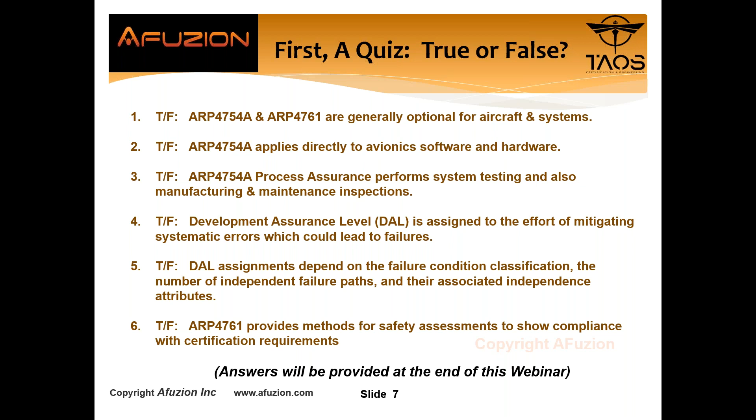6 easy true-false questions. We'll provide the answers in 45 minutes, but if you pay attention, you'll get the answers during this 1-hour training video. Okay? First of all, I'd like to turn it over to Nazan, who will tell us why these standards are mandatory. Nazan? Yes, thank you, Vance.

We call it mandatory because both ARPs support the aircraft certification process by showing compliance with 1309 requirements. The guidelines in ARP4754A were developed in the context of large airplanes, Part 25 aircraft, but it can be applicable for other parts like 23, 27, 29, and 33 and 35. That means small aircraft, rotorcraft, engine, and propeller.

ARP4754A provides development assurance for functions and systems only, and sets objectives based on those development assurance levels.

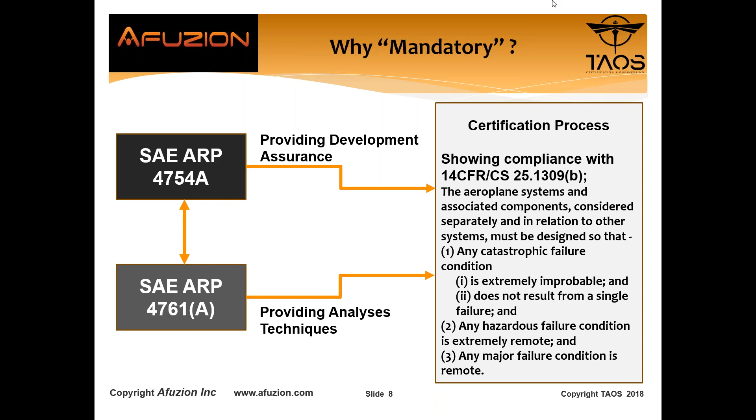The FAA also issued AC 20-174. It recognizes ARP4754A as an acceptable method for establishing a development assurance process. Also, FAA AC 25-1309 Arsenal version and EASA AMC 25.1309 recognize both ARPs as an acceptable method for showing compliance.

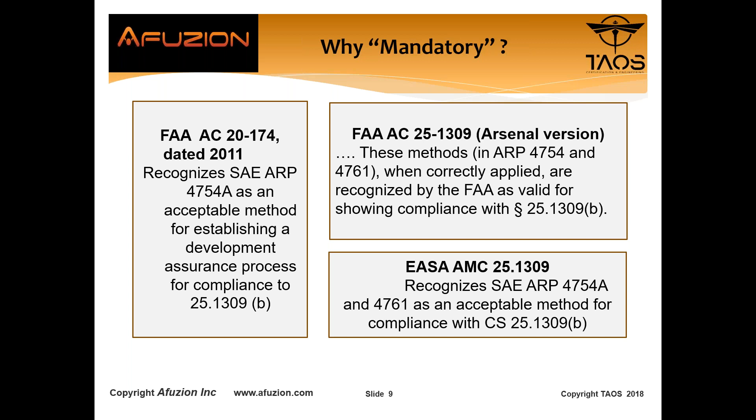And I am giving the words to Vance for the 4754A presentation. Thank you, Nazan. Let's talk about 4754A just a minute.

Nazan summarized 61. Now, 4754, the prior version, was certification considerations for highly integrated or complex aircraft systems. What a word, right? Highly integrated, complex, very subjective. That was the issue. While generally mandatory, it really wasn't enforced.

It came out in 1996, right about the time aircraft complexity was really dramatically increasing via hardware, software, and architecture. We needed a new document, 4754A, one little letter, the A version, the next version. It was almost 14 years later it came out, in 2010, but it was mandatory in 2011.

Look at the name, Guidelines for Development of Civil Aircraft and Systems. However, it's now being applied to military and other industries.

4754A was guidelines, and so we need to consider the overall aircraft operating environment and functions by continuously considering the system safety assessment. So it includes the validation of requirements, verification of the design implementation, and also process assurance, which remember is quality assurance on steroids, right? We call it process assurance because it's more than just developmental QA.

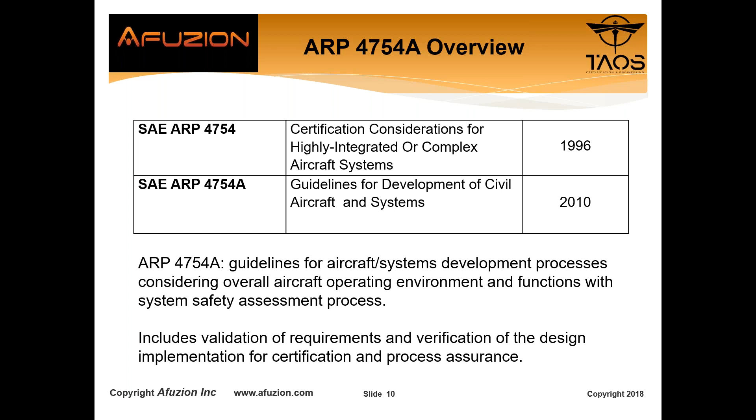It's all aspects of the integration, suppliers, audits, and everything.

And then the appendices. We have real objectives, okay? We have a safety program plan. We have FDAL and IDAL, big words. Nazan will explain those. And then we have the appendices. So we'll go ahead and talk about that and how we move those.

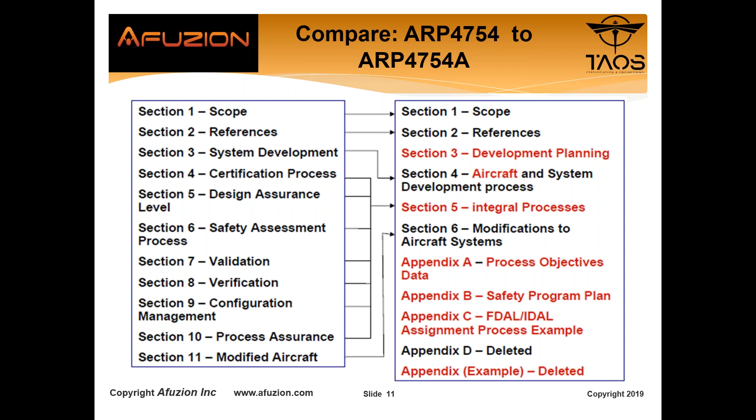And it's going to be really important to see how the new version, just coming out here, it's all done, should be released this year, 4761A, how that has changed also. But look at the model of 4754A.

Then we allocate the functions of the aircraft to various systems: thrust, control, landing. Then we develop the corresponding system architectures and aircraft architectures. We allocate system requirements to specific items, implement those items, and then we have the document suite. Look at that, it's rather a progressive waterfall.

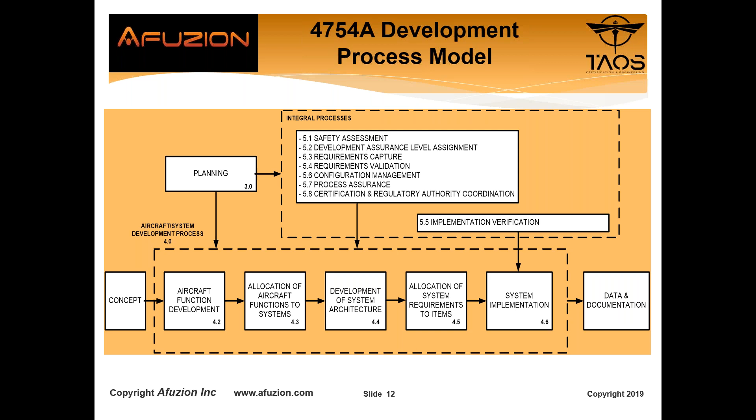And then requirements, validate those requirements. Configuration management, process assurance, and certification. Those are continuous in the background. That's the ecosystem, and it affects the hardware and software, as we'll see in a moment as well.

Well, right here, for safety critical development, we've got three key processes. This is identical throughout the software 178C, hardware 254, CNS ATM ground-based systems DO278.

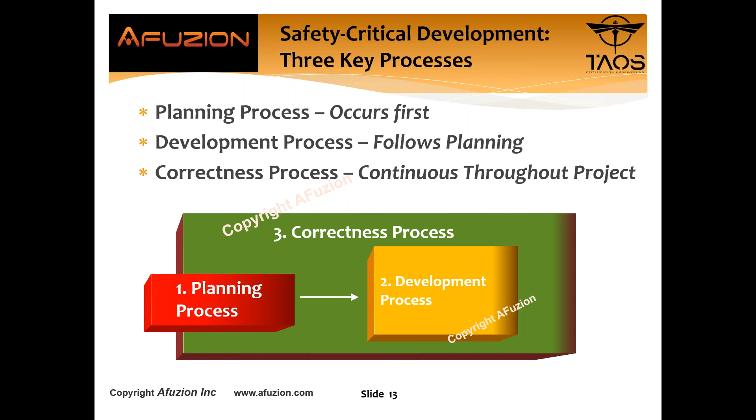Why is that green? Great question. I made it that way because green is the color of American money. All of our money in America is green. Green means money. The most expensive part of systems development really is the correctness process. The least expensive is the planning. It's the smallest, but it's the most important. If we don't have good plans, we cannot assess to those plans.

Okay? So let's look. There are 6 basic steps of 4754A. First, prove that we have applicable adherence to regulations and certification guidelines. So we have to plan our aircraft and our systems development lifecycle with detailed plans. We have to show how we're going to have interfaces within that ecosystem. Then, next, we start these safety activities. We implement them. We follow 4761, and we'll be explaining those in just a moment.

We have to define, then justify the criticality level, the design assurance level, the DAL, the development assurance level. Wow, 6 words, they all mean the same thing. DAL, how critical is it? Then define the system architecture and the requirements. Validate those. Remember, verification: do I have an implementation that meets the requirements? Validation: do I have the right, correct, complete requirements? They're equally important, but in our opinion, validation is more important. It's fundamental in 4754. If we don't have the right requirements, it doesn't matter if we implemented them, right?

Number 5, then perform verification. Does implementation meet those requirements? And ensure we have configuration management so we know who made every aspect of the system and safety processes for everything that's flying. Can we rebuild it 30 years later? And finally, implement process assurance. That's quality assurance on steroids, remember? And prove the transition criteria, entry, exit. Before we progress to the next stage within this process, have I met all the entry and exit criteria? That's transition criteria. Engineers follow the transition, QA assesses and records it.

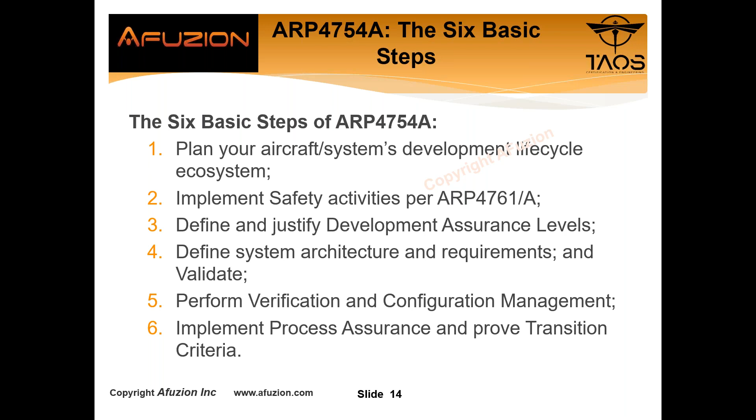So the planning element, let's talk about 2 slides here. There's 8 steps total. Number 1, development planning. What are the process methods for establishing our architecture, either aircraft or system, subsystem, or item? How are we going to develop it, integrate it? How are we going to implement it? How will we show compliance with 4754, 4761, all of the TSOs, technical standard orders, STCs, supplemental type certificates, all those aspects that apply, plus the EASA, FAA, CAAC, Transport Canada, whatever our certification authority is. And remember, folks, military is adopting this as well.

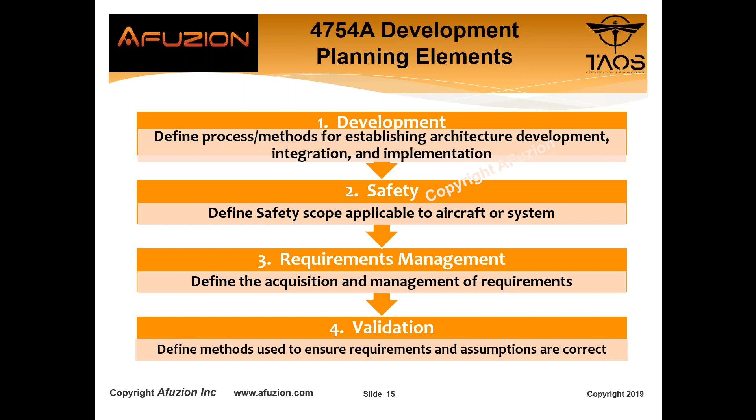So we have to define the safety scope that's applicable to the aircraft or system, and we'll use 4761 for that. We'll see in a moment. We have to show that we can manage the requirements, define how we acquire them, how we manage, how we determine the safety requirements, then validate. What are the methods I'm going to use to ensure the requirements and the assumptions are correct, complete, feasible, unambiguous? Then implement. That's often through 178254.

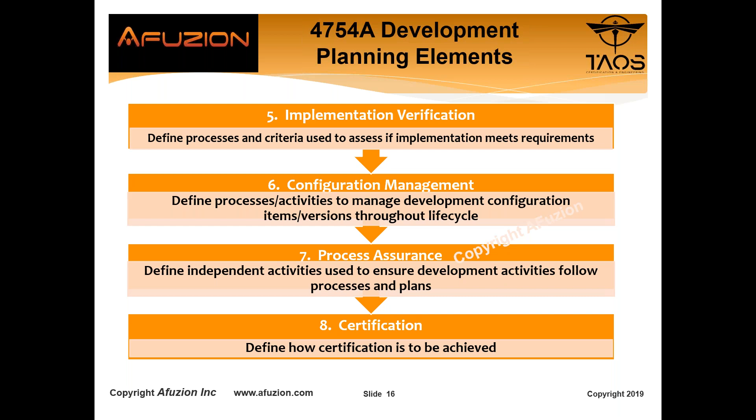The good news, folks, once each of you has these good plans in place, you should have portability for future projects. You should be able to use them with very few changes on the subsequent projects. So do it right the first time. You won't have to do it again. The ecosystem looked like this.

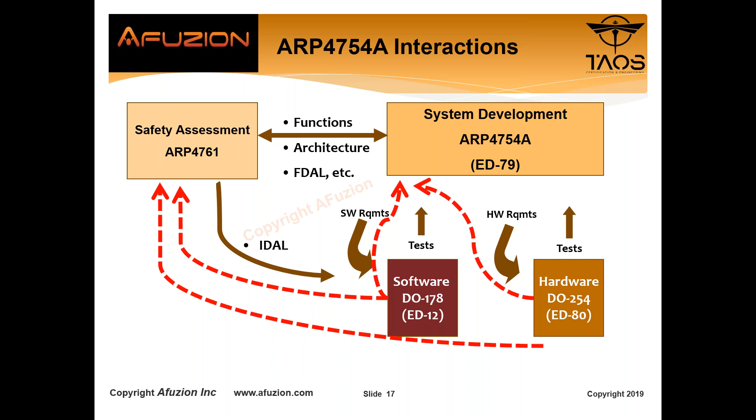ARP4761 describes the guidelines and methods for performing safety assessment and analysis. As we see, we use those guidelines as showing compliance with certification requirements. 61 is applicable for all aircraft types, small, large aircraft, rotorcraft, UAVs, military aircraft, and also it can be applied for engine and propeller. So the current version was initially published in 96, but the A version will be published this year, Q3.

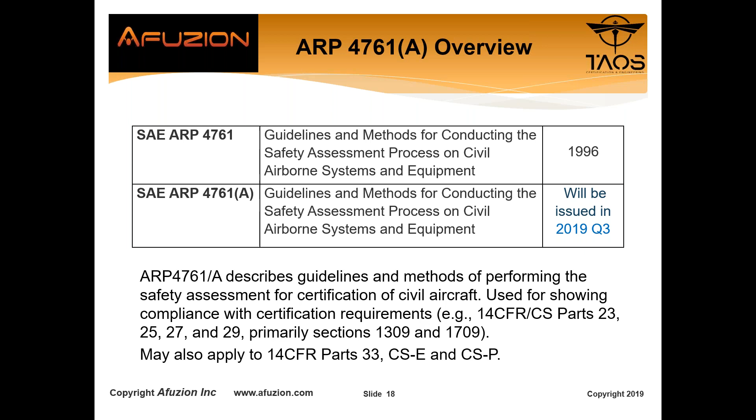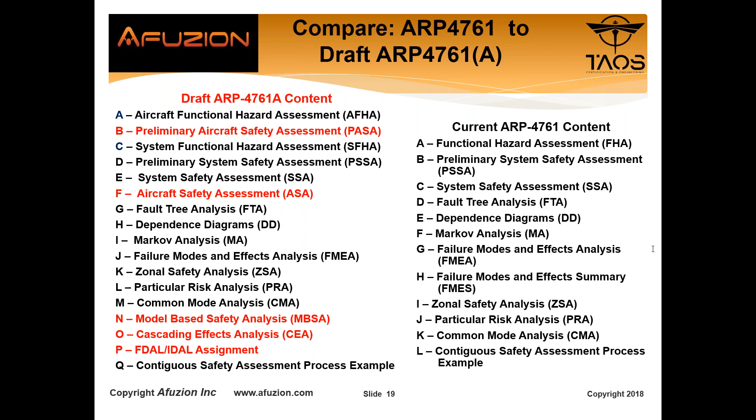ARP4761 applies to everyone, from aircraft manufacturers like Boeing, Airbus, Bombardier, TAI, or STC holders, system integrators like Honeywell, Rockwell Collins, equipment suppliers, a wide range of avionics equipment providers, certification authorities, FAA, EASA, Transport Canada, and other CAAs.

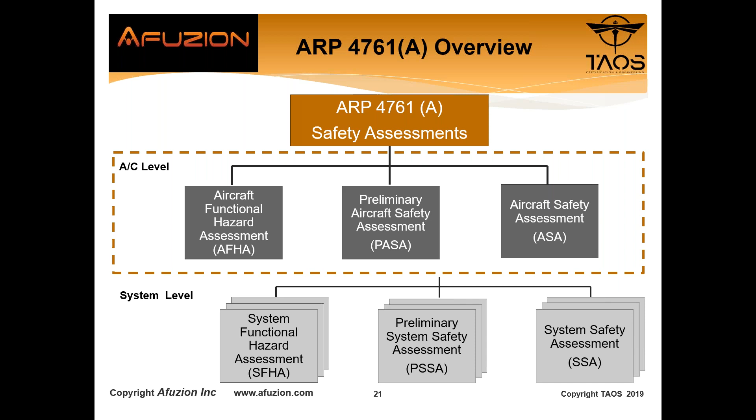There are a number of analyses in 4761: fault tree analysis, dependence diagram, and Markov analysis. Fault tree analysis supports PASA and PSSA. It evaluates a proposed aircraft and system architecture to assign hardware failure probability budget. It also identifies functional failure sets in order to assign development assurance levels during the PASA and PSSA process. It shows compliance with qualitative and quantitative safety objectives as part of the SSA and ASA.

Failure mode and effect analysis is a bottom-up analysis technique. It identifies failure modes and failure effects. It can be developed at any level, like function, system, equipment, or piece part. FMEA may be performed for any reason, but in 4761 appendixes, it is addressed to support the safety assessment process.

Cascading effect analysis is a new analysis in 4761A. It is a qualitative bottom-up analysis technique. It evaluates an initiating condition and its total effect on the aircraft. Because of the system dependencies, an initiating condition may propagate from impacted systems to other connected systems, like resource system failure modes, like shared component failure modes.

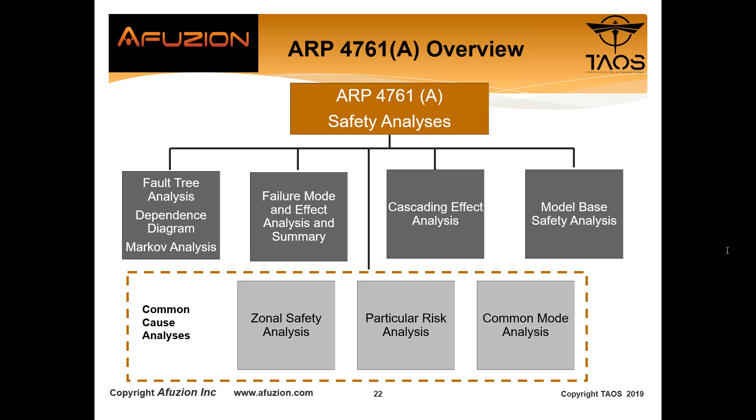Now, development assurance. What is development assurance? Development assurance is a process, planned and systematic actions that provide an adequate level of confidence that errors, I'm just emphasizing errors, in requirements, design and implementation have been identified and corrected. Understanding of error contribution to a failure is important. Failures can be divided into two categories, systematic failures and non-systematic failures. Mitigation of non-systematic failures, like random hardware failures, is performed by setting safety qualitative and quantitative requirements.

But systematic errors that lead to failure are not associated with any physical changes and will always occur when a given set of conditions are satisfied. Software failures are always systematic. Specification errors, requirement errors, design errors, component deficiencies, all those are systematic errors.

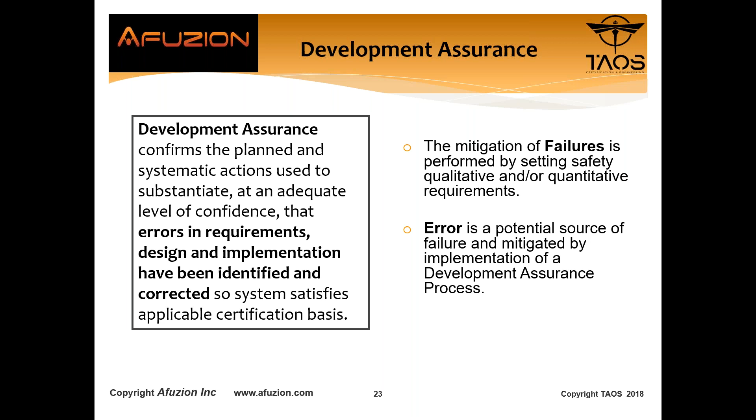So for simple systems, errors can be detected by exhaustive testing, but for complex and integrated systems, exhaustive testing may be impossible or impractical because of the number of tests, and all of the system states cannot be determined for those tests. For this type of complex system, compliance is shown by using the development assurance process identified in 4754A. Next slide, please.

There are two types of development assurance level in ARP4754A, FDAL and IDAL. DAL sets the level of rigor for development assurance activities, FDAL for function and system, IDAL for hardware and software. Traditionally, development assurance was performed at component, hardware, and software level by DO-178 and DO-254. But for today's complex systems, it was insufficient. Therefore, an additional development assurance process for aircraft and systems is defined in ARP4754A as FDAL. So 4754A defines the process to apply it only for FDAL, and 4761 safety processes identify FDAL and IDAL. Next slide, please.

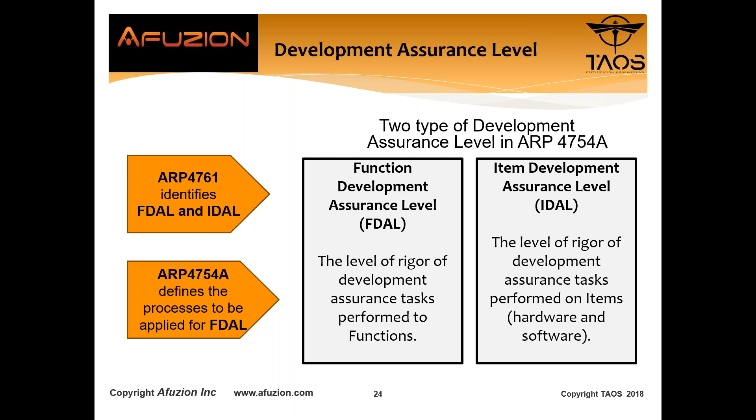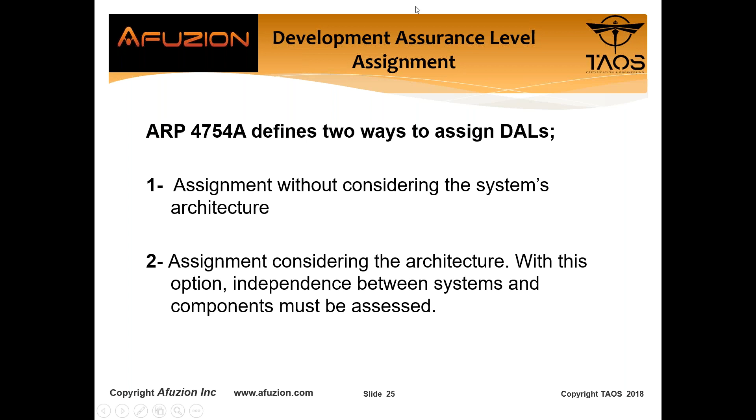ARP4754A defines two ways to assign DAL. One way is assignment without considering the system architecture, and another way is assignment considering the system architecture. With this option, independence between system and components must be assessed. Next slide.

For a good understanding of FDAL and IDAL assignment, we need to understand the definition of functional failure set, members, and independence. A functional failure set is equivalent to a fault tree minimal cut set. A minimal cut set, as we know, is the smallest combination of basic events which, if they occur, will cause the top event to occur. So a member of an FFS can be an aircraft system function or item that may contain an error causing its loss or malfunction. Independence is a concept that minimizes the likelihood of common mode errors between aircraft system functions or items. So the FFS looks from an error point of view compared to a fault tree minimal cut set. Next slide, please.

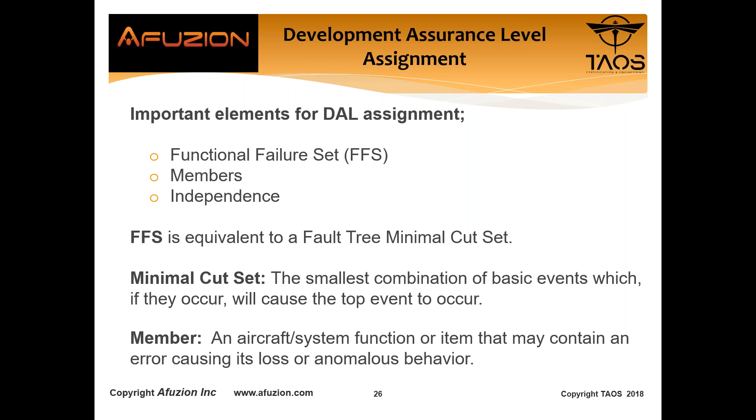In 4754A, there are two tables. The first one explains how we assign DAL without architectural consideration. According to this table, FDAL is assigned to a top-level function based on its most severe top-level failure condition classification, identified in the FHA. So classification using this table may result in a more conservative assessment. If the failure condition classification in the aircraft or system FHA is catastrophic, we assign DAL A. For hazardous, B. Major, C. Minor, DAL D. No safety effect takes DAL E. Next slide.

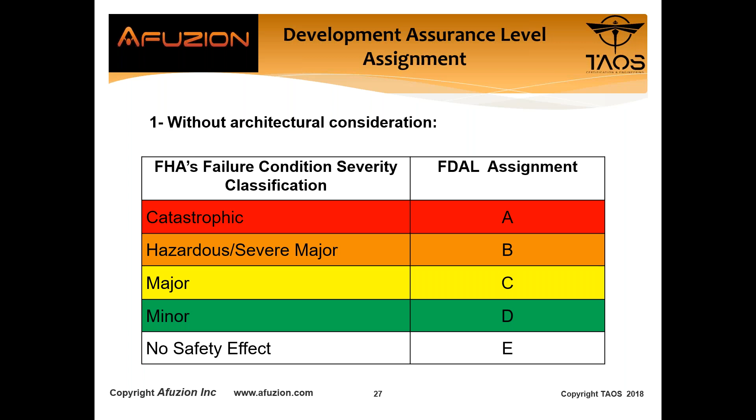Second DAL assignment table in 4754A considers the architecture. Once an aircraft FDAL is assigned to a top-level function based on the first table, the architecture of system functions is examined to determine the development assurance level of those system functions. If a catastrophic failure condition could result from a combination of possible development errors between two or more independently developed aircraft system functions or items, we can use option 1 or option 2.

So one member can get FDAL A and the other one can get FDAL C, or both members can get FDAL B. Let's just imagine we have a navigation and communication system. Both systems provide flight data. Since those two systems are independent from each other, we can use either option 1 or option 2. So we can assign the navigation system FDAL A, communication system FDAL C, or both systems can get FDAL B.

Or for example, in our design, we have a primary flight display and a standby display. Since both displays are independent from each other, we can use this table, option 1 and option 2. Primary flight display can get FDAL A, and the standby system can be assigned FDAL C, or both systems can get FDAL B. We can use option 1 and option 2 as long as we show the members are independent. Members mean systems like navigation and communication, primary display or standby display.

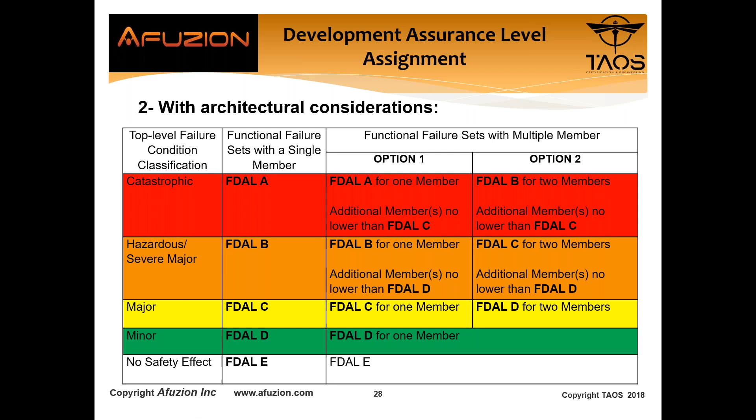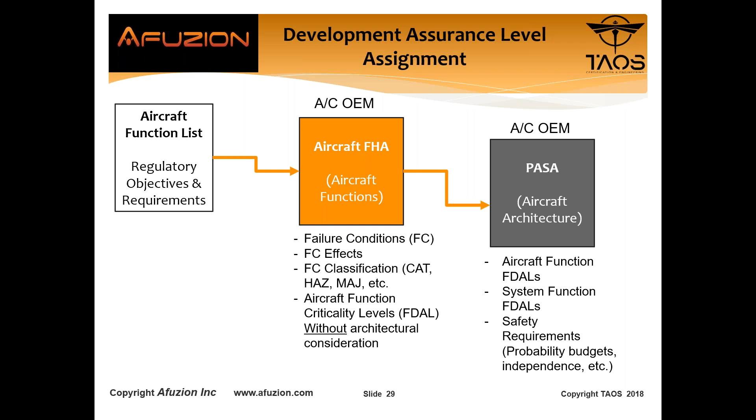And then those requirements go into PASA, preliminary aircraft system safety assessment. So we evaluate the proposed aircraft architecture. As an output of PASA, aircraft function FDALs, system function FDALs, safety requirements, probability budget, and independence requirements are generated. Next slide.

In this slide, we summarize the system level top-down assessment. The aircraft OEM performs their FHAs and PASA. All the requirements and system list go to the system provider's system FHAs. System FHAs evaluate system functions. System failure conditions, effects, and classifications are generated as an output of system FHAs. Those failure conditions and classifications go into PSSA. PSSA evaluates the proposed system architecture.

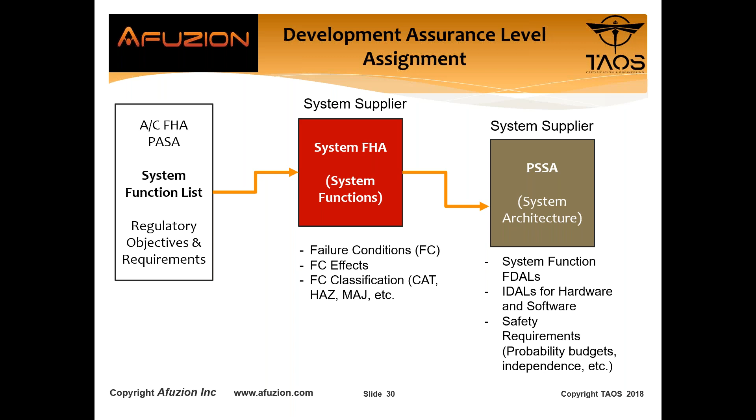As an output of PSSA, system function FDALs and IDALs; in this case, we assign DALs for hardware and software by preliminary system safety assessment. Safety requirements, probability budget for components, equipment, items, and independence requirements are generated by preliminary system safety assessment. Next slide will be an example.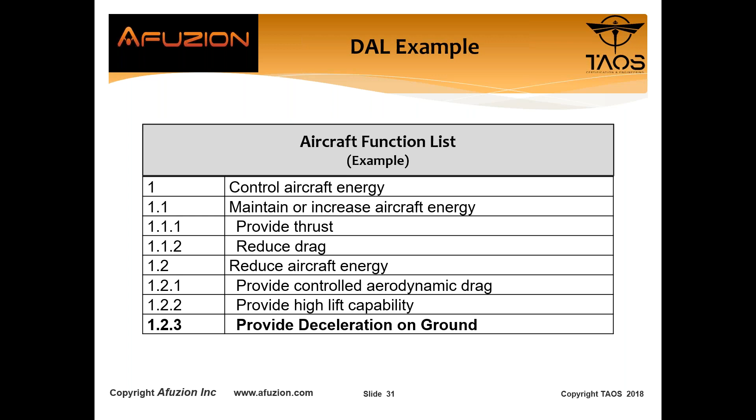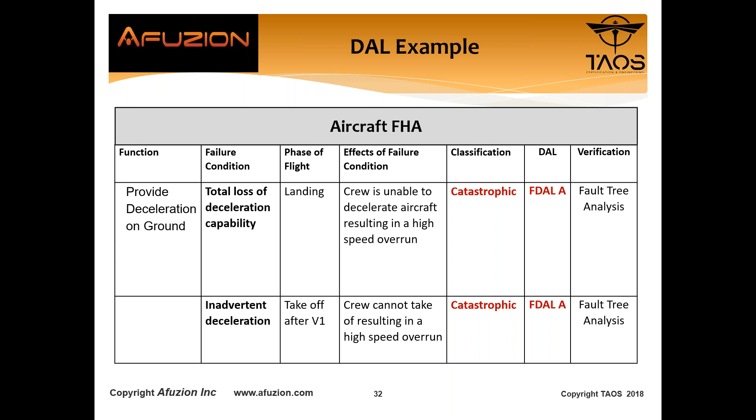Provide deceleration is one of the aircraft level functions. We assess all the failure conditions. Total loss of deceleration capability and inadvertent deceleration lead to catastrophic. So we use table 1. Since the classification is catastrophic, we assign those failure conditions FDAL A. Next slide. These functions and classifications go into PASA, Preliminary Aircraft Safety Assessment.

In this assessment, we evaluate the proposed aircraft architecture. In our example, the provide deceleration on ground function is performed by the engine thrust reverse system, ground spoiler system, and wheel brake system. In the next slide, we will evaluate those system interactions in a fault tree. Next, please.

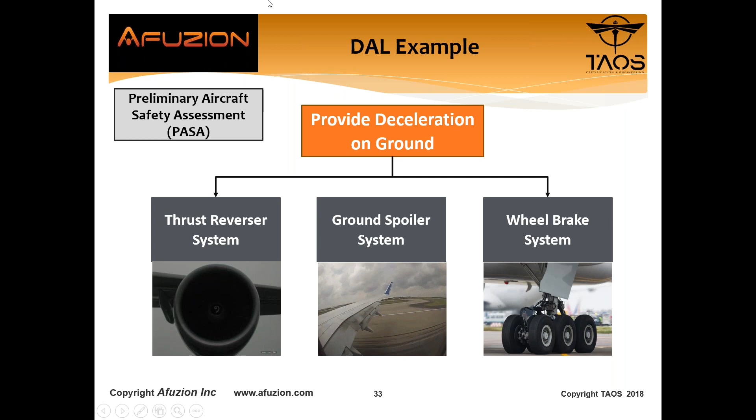In the fault tree, we generate a minimal cut set, functional failure set. As we see in the minimal cut set, there are redundant, independent systems. So failure of thrust reverse and speed brake, or failure of thrust reverse and wheel brakes, leads to total loss of deceleration capability. Since we have 2 members in the FFS, we can use table 2, option 1 and option 2. We can assign one system level A and the other level C, or both systems can get level B.

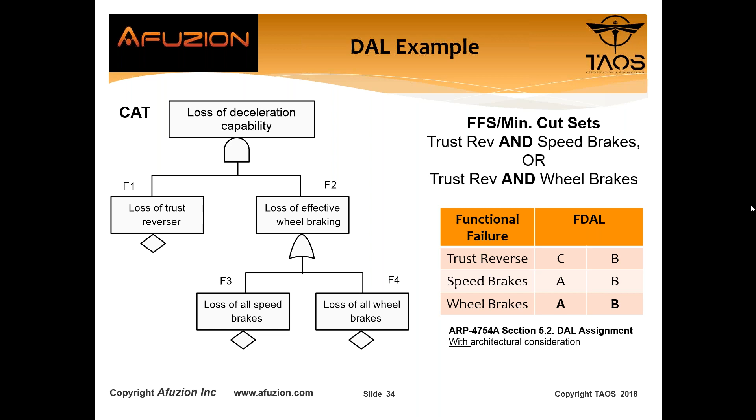But before we finally assign DAL, we have to assess all failure conditions. In the next slide, we will see how it changes the allocation of DAL. Next, please.

Here is another failure condition, remember, it was catastrophic: inadvertent deceleration after V1 decision speed. In the fault tree's minimal cut set, we see each of the systems alone leads to inadvertent deceleration. So single member FFS. In this case, we cannot get credit from architecture. We cannot use option 1 or 2. We have to assign each system level A: thrust reverse FDAL A, spoiler FDAL A, and wheel brake FDAL A. So we know the deceleration function is FDAL A and the wheel brake system is FDAL A.

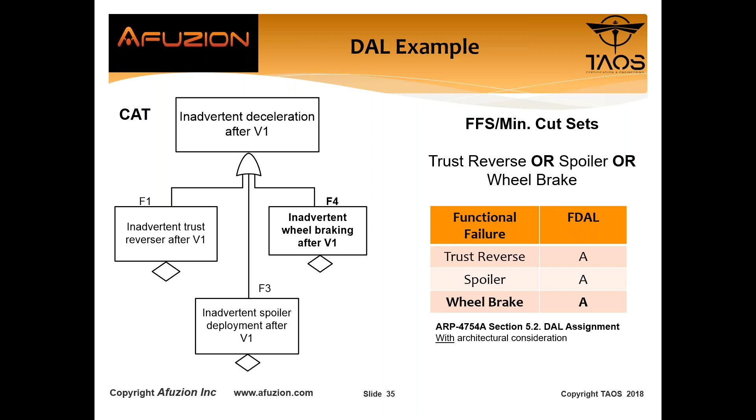In the next slide, we will go deeper into the PSSA process. So now we know the wheel brake system is FDAL A, and we assess the proposed system architecture.

System has complex BSCU control computer, braking system control unit computer, which leads to inadvertent braking, which is catastrophic. BSCU has 2 command and 2 monitor channels, independent from each other. This is the proposed architecture, right? In this case, we can use table 2, option 1 or option 2. In our example, we take option 2 and assign command and monitor software and hardware IDAL B.

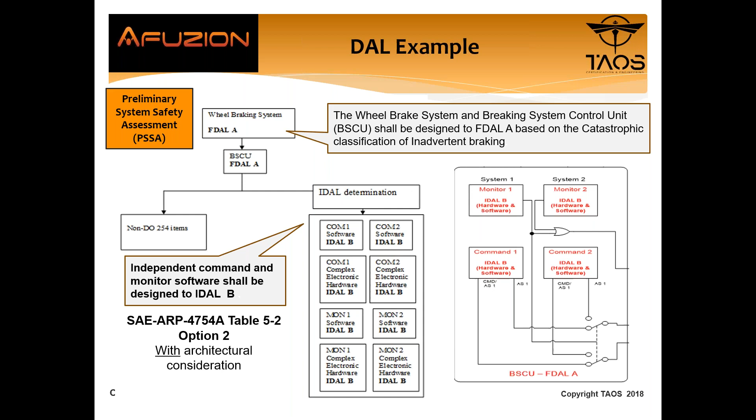So it's up to the designer how the proposed architecture goes into preliminary system safety assessment. DAL assignment depends on the architecture and how we shape the design. So in the next slide, we will summarize the DAL assignment result. Here we know from aircraft FHAs, deceleration function is catastrophic and we assign FDAL. And then we know braking system leads to catastrophic because of the inadvertent braking.

We assign FDAL. We know braking system control unit is a complex system leading to inadvertent deceleration itself. So we assign FDAL-A. FDAL-A should be managed by 4754A. We use 4754A development processes to mitigate the errors in those systems. And for IDAL, command and monitor hardware and command and monitor software get IDAL-B, and we should use for development assurance process DO-178 and DO-254.

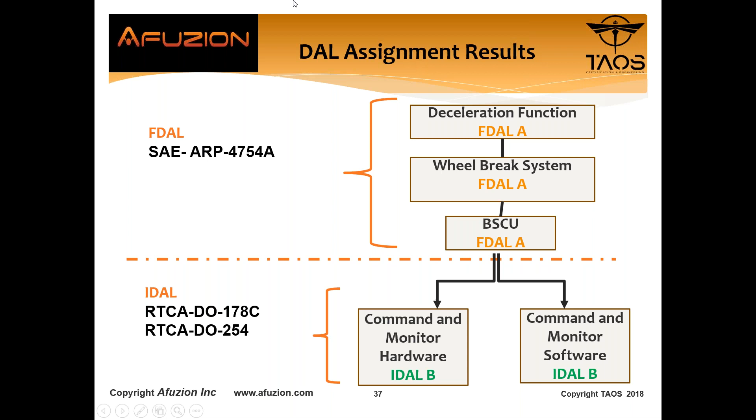And next slide is presented by Vance. Thank you, Nazan. That was a great synopsis.

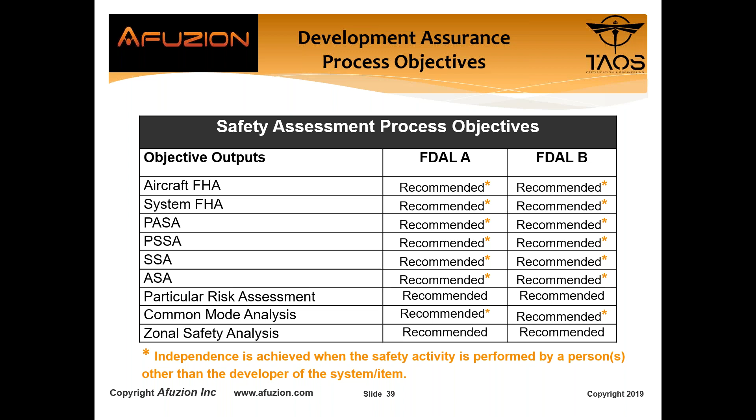Then zonal safety. Think of space. If I have my coffee pot right above my avionics bay, and my coffee machine leaks water, the avionics didn't cause the crash, but the water did, the coffee pot, you see. So consider the zonal safety aspects, installation, maintenance, all of those things as well.

Now, validation of requirements. This is key. Remember, are the requirements correct, complete, feasible, unambiguous? So I need to prove that I have criteria. I need checklists, I need processes. I need to have recommended and independence of validation results. Have I validated the aircraft item requirements? Are they complete and correct? Do I have validation results? Are my assumptions justified and validated?

Then, what about derived requirements? Remember, derived is a funny word, even for native English speakers like Americans. Typically derived means to come from, and it does, but typically derived requirements don't necessarily come from a parent requirement. They come from a consideration by a developer or a safety engineer to add an architectural consideration, system consideration, software or hardware consideration that may not be directly related to functionality. Therefore, it's not necessarily decomposed or derived in the official sense from a parent requirement. It's derived from that safety engineer or that hardware software system engineer's desire to force a certain implementation. That's a derived requirement. Derived requirements can't be reviewed in the same way as functional requirements in the context of a parent.

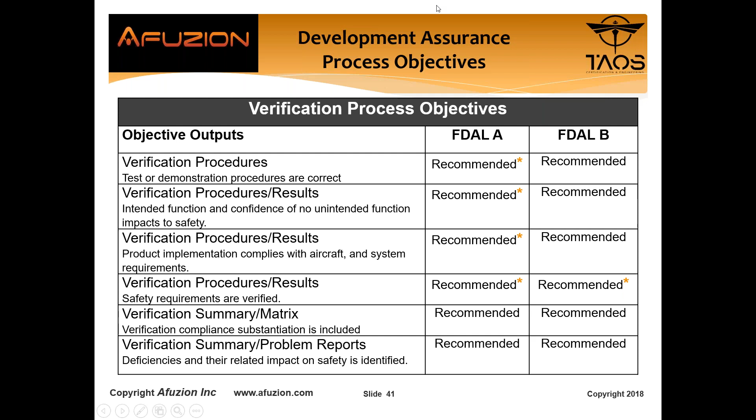Common safety process mistakes. Here they are. Number one, the company doesn't provide adequate support for safety assessment or development assurance activities. In the old days this was less formal, frankly. Here, we have to show that we have a process, a plan for achieving compliance or equivalence to 4761A and 4754A. The safety process, number two, needs to be incorporated into the system development process. So we can't add safety in later.

Think of building a house, a building. We can't improve the foundation, not realistically, after it's built. So I need to know what kind of foundation I have. Do I have earthquakes, tornadoes? How many floors will the building have? I cannot add safety in later. It has to be done before and during development. Avionics is more complex than building houses and buildings, so we absolutely need that for safety in avionics.

Late identification, number 3, of failure conditions. Again, we need to identify them early and build in architecture, health detection, monitoring, voting, TMR, triple modular redundancy, whatever we're doing, early. Finally, inappropriate analysis methods related to that. How can I show that I've really considered not just the obvious errors, but potential single point failures or likely potential combinations of failures?

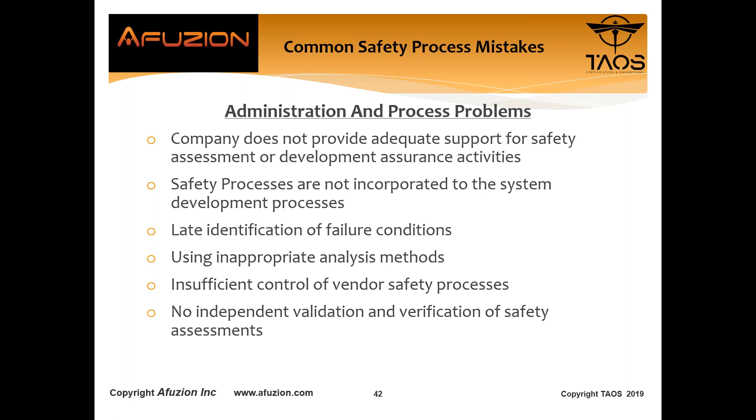That was it. Well folks, you made it. Here we are, slide 43, answers to the quiz. How'd you do? Number 1, 4754A and 4761 are generally optional for aircraft and systems. True in the past, that is false today.

Number 2, 54A applies directly to avionics software and hardware. Not really, okay? Software is 178, hardware is 254. 54A comes first and then after, it's an ecosystem, continuous feedback. So yes, it indirectly applies because we allocate DAL architecture, but no, 54A is at the aircraft and system level.

Number 3, 54A process assurance. Remember, that's quality assurance on steroids, vitamins. Does 54A process assurance perform system testing and also manufacturing and maintenance inspections? Folks, that might be true at Microsoft, Intel, Apple Computer, but it's not true in aviation. In aviation, quality assurance, process assurance is about ensuring that the plans, the standards, the checklists are all in place and meet compliance to the applicable regulations and guidelines.

Number 2, process assurance QA is about auditing, assessing. Are the engineers following those plans? Can we prove it? Number 3, have we kept records? Okay, checklists, audit results. And then for process assurance, there's 2 more things that quality assurance doesn't do. It's the manufacturability—can I reproduce that same equipment or equivalent in the future—and then supplier audits as well. That's process assurance, those 5 things.

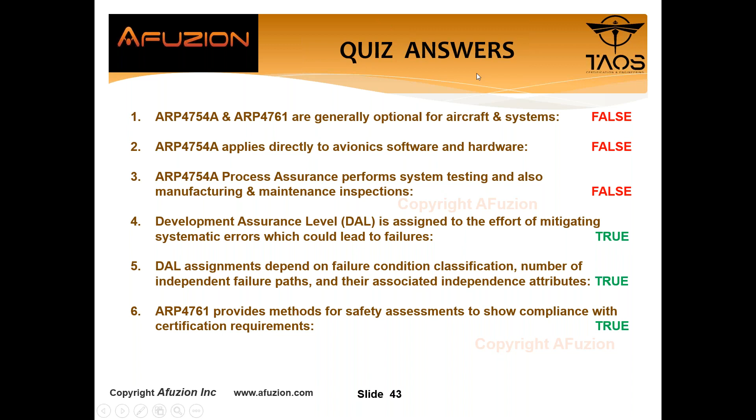Number 5, DAL assignments depend on failure condition classification, number of independent failure paths, and their associated independence attributes. That is true. Number 6, 4761 provides methods for safety assessments to show compliance with certification requirements. Absolutely, that is true as well.